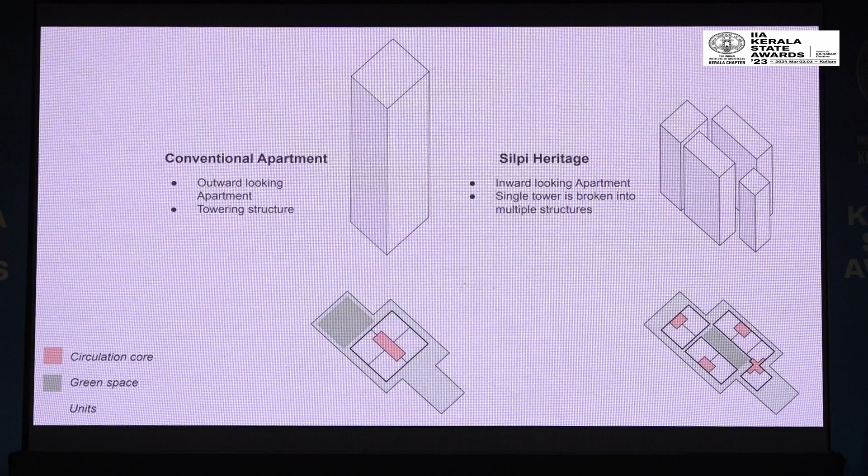Another conscious effort to create a project that remains humble to its context is to break the mass of the structure and its perceived scale. Instead of a tall, towering single structure, four narrow blocks of slightly larger floor area and consequently lower height are placed on the site. The mass is broken down to create a courtyard reminiscent of traditional family residences in the Nalukettu style.

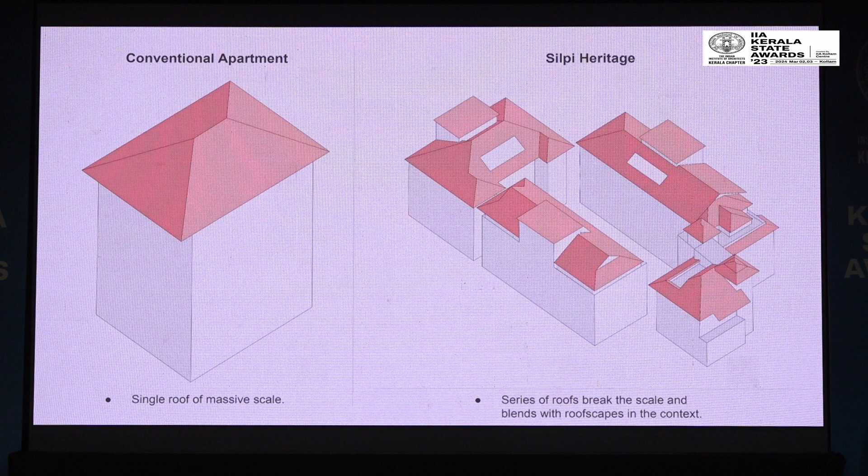With the disintegration of building mass, we were able to create an assemblage of hipped roofs of smaller scales. In this case, the scale of the roofs of our project matched the scale of the roofs of other buildings within the context. The attic spaces resulting from these sloping roofs function as shared utility spaces.

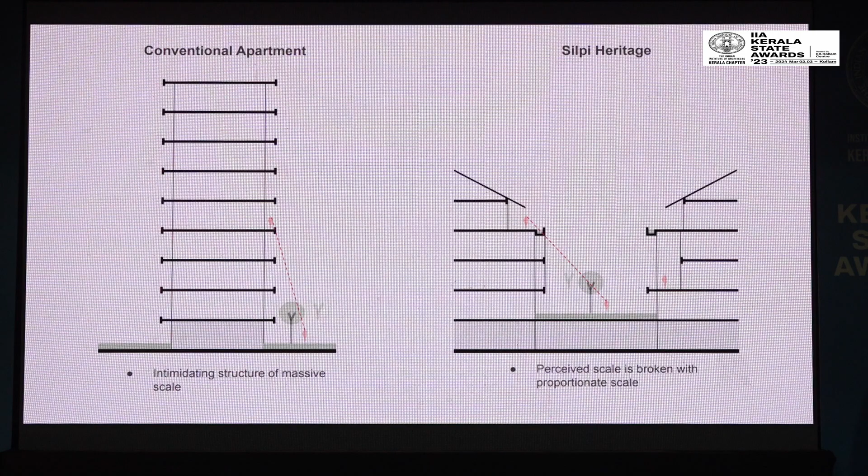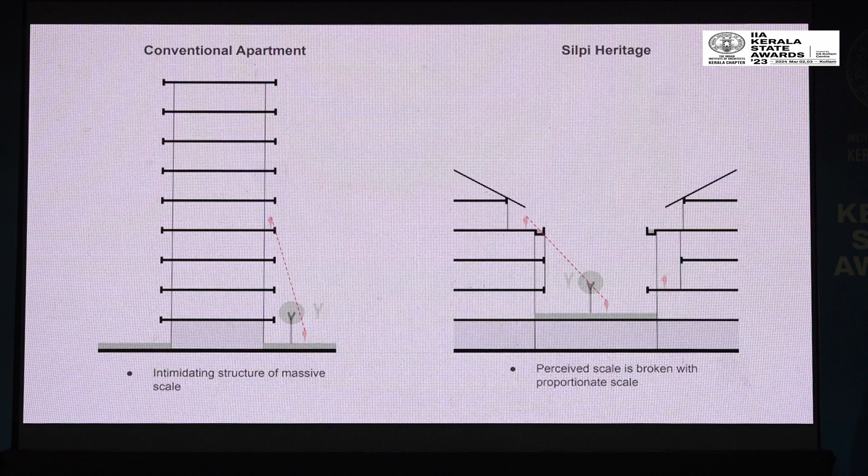These roofing structures also help break the scale perceived from the courtyard. Through this, one is not intimidated by a tall structure with a monotonous facade, but is allowed to be within a more intimate space that promotes interaction among neighbors. The variation in facades, with double-heighted balconies, recessed and protruding balconies, also helps break the perceived scale.

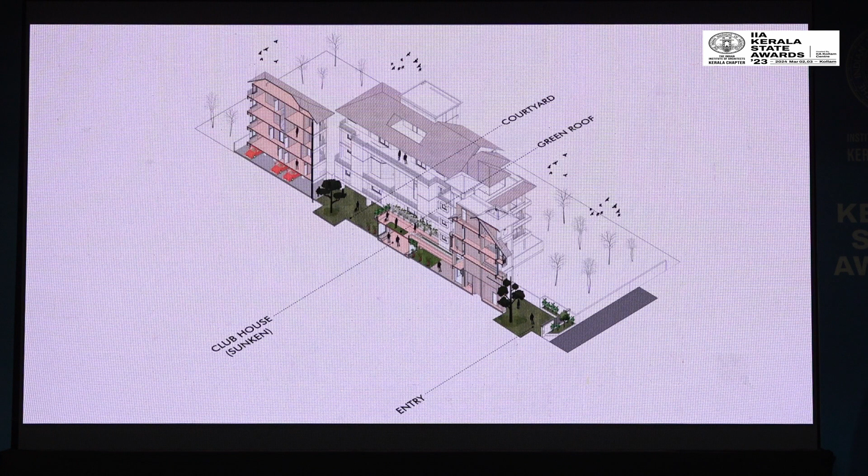The scale perceived from this courtyard is also broken down with the help of varying levels. The central courtyard is split mainly into two levels, with a clubhouse recreational zone on the ground floor. The clubhouse spills onto this green space with a slightly raised platform at its end. The space above the clubhouse becomes a green terrace on the first floor, connected to the ground with elaborate steps. There is also a staircase at the entrance that takes you directly to this podium.

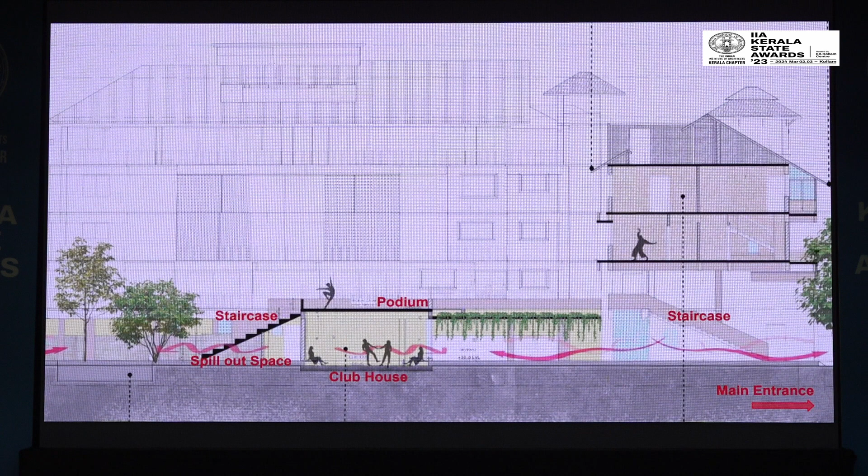With this configuration, we've also been able to retain some valuable trees within the site. Through this configuration of mass and void, of building and courtyard, we've been able to create an inward-facing apartment rather than the conventional apartment that is outward-facing and cut off from the rest of the complex.

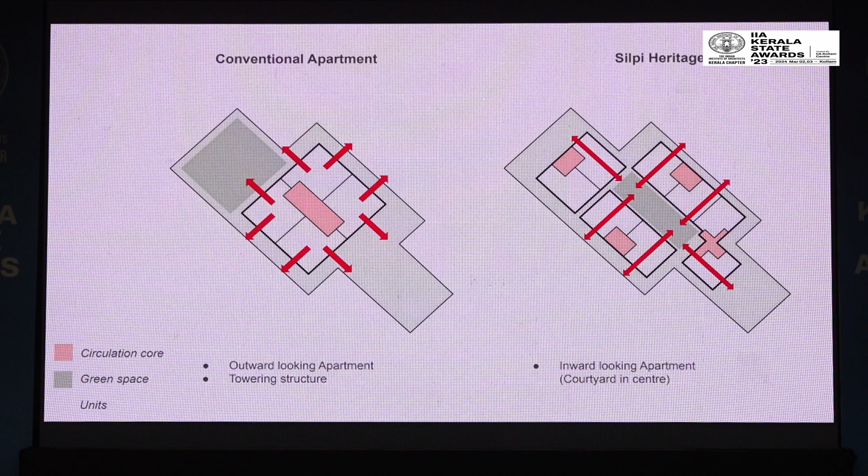With these inward-facing units, the neighborly relationships among residents are enhanced, promoting interaction. There has also been an attempt to maintain privacy by placing most of the bedrooms on the exterior side. It is also important to note that there are no typical floor plans within the project.

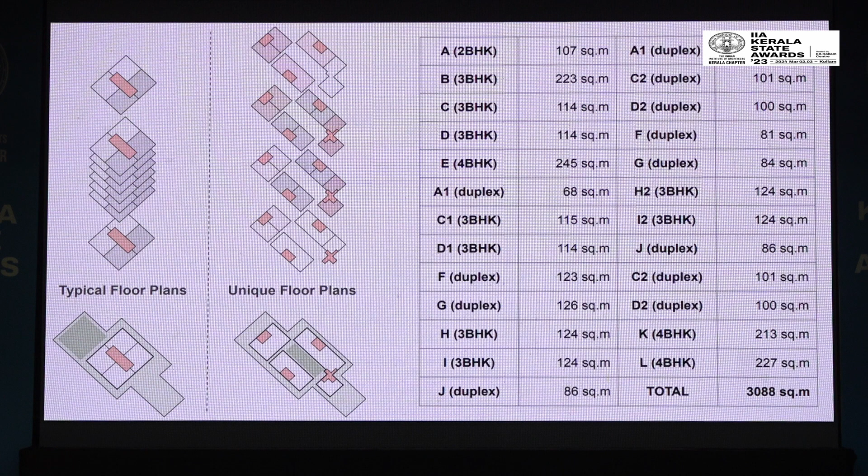The area of all offered units varies from about 1,000 square feet to 3,000 square feet. This variation caters to the unique needs of residents and buyers, and also helps avoid monotonous and repetitive facades. The project offers 2 BHK, 3 BHK, and 4 BHK apartments, and even includes duplexes and penthouses.

So next, coming to the car parking. Already adding to the points Namrata made, technically we have used around 50% coverage, but still what we have tried to do is maximize the utilization of the ground floor by bringing the terrace garden just above the clubhouse, and to utilize the space around the clubhouse.

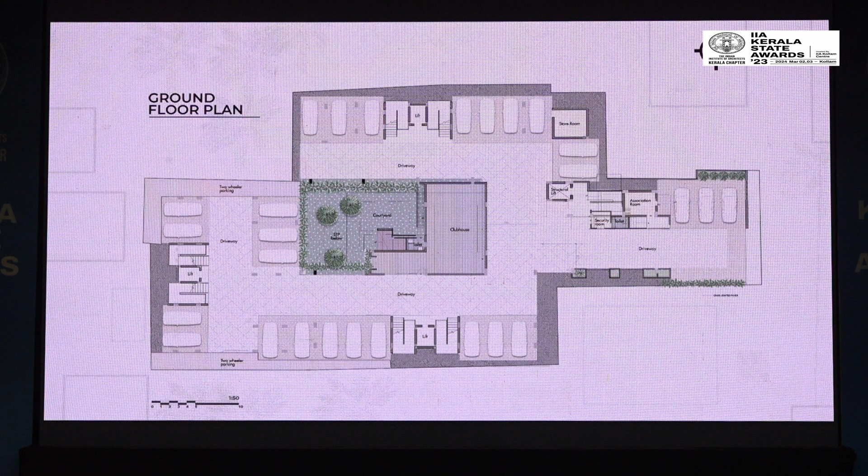For that, what we have done is bring the car parking onto the ground floor itself by giving the building on stilts rather than considering a basement. It also helped reduce the construction cost to an extent. Then by bringing this parking to the periphery, we gained extra space to spill out from the clubhouse and the central courtyard.

Then coming to the entry, what we have done is gained inspiration from the nearby building. So the entry is mimicking an Anavadil, which we could see in the nearby structures. The arrival is also resolved such that the parking spaces are kept hidden from the first point of entry. This is the entry from the Anavadil.

Then on the facade, we could see an element that we were inspired by, Kilivadil, which is also a building element found in the nearby buildings. Then we had given some viewing decks. We named it the Athachamayam deck, from where we can view the procession happening in the streets.

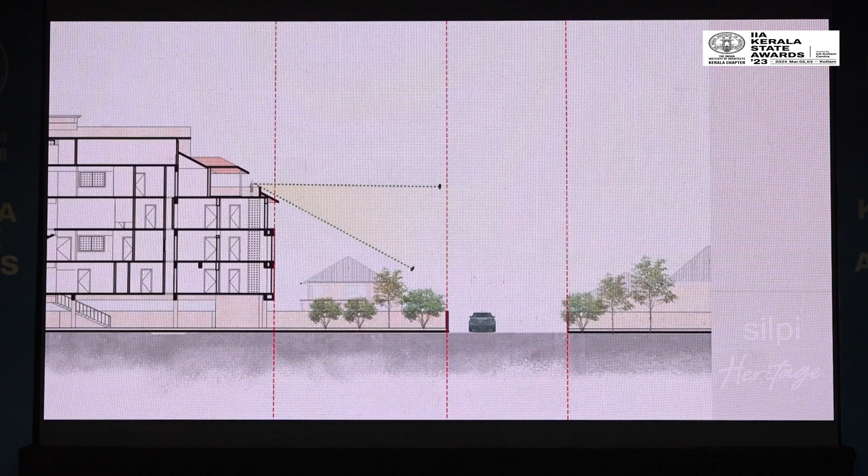Coming to the more technical details, while the available FSI was 4, the FSI consumed is only 2, with a ground coverage of 53%. While we could have built approximately 8,000 square meters, our project area is only 4,750 square meters.

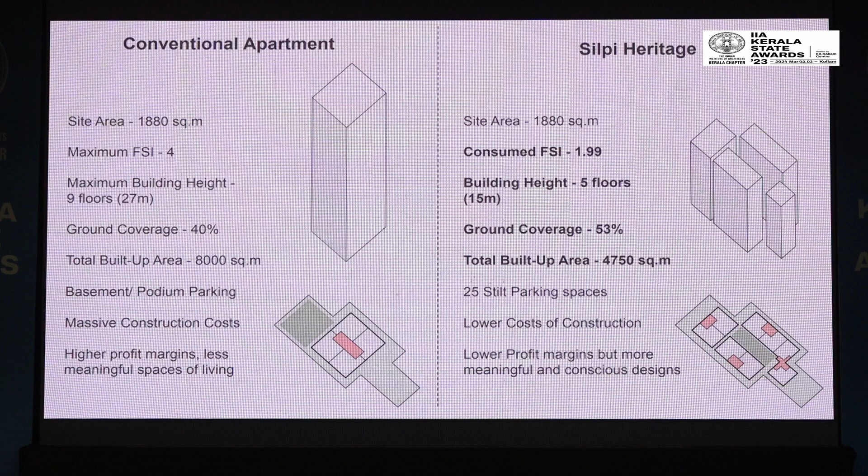After all, Charles Correa did once say, market forces do not make cities, they destroy them. And the reason we were able to create a project that deviates from conventional notions set by most developers is because here, the architect is also part builder.

Silpi Architects played both roles of a designer and a developer. Through this pairing of roles within the firm, we were able to compromise and draw a fine line that caters to the aesthetic and conceptual concerns of an architect while adhering to the concerns of construction costs and profit margins set by a developer. And the success of the project is that now people yearn for apartments like this.

In fact, we have interested buyers and are working on another project that borrows values from Silpi Heritage. I'd say this project is also an example for builders to understand that it is possible to create housing schemes that are unconventional yet profitable and successful.

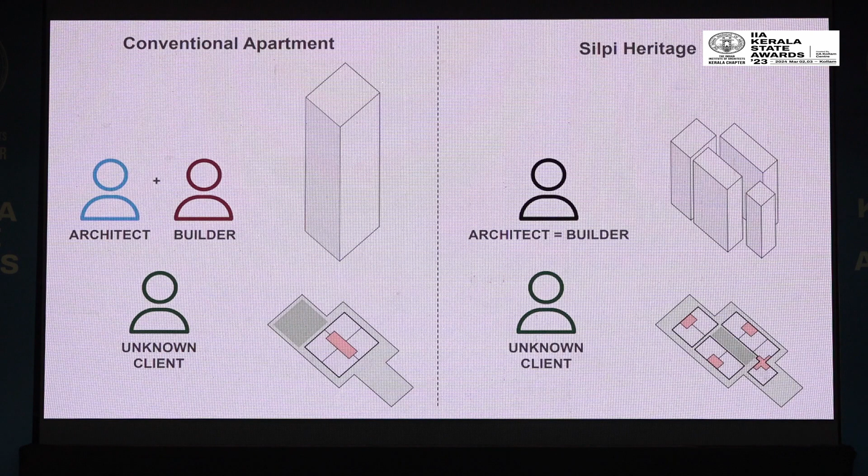I think you have articulated the USP of the project very well, which I think in these awards cycles, or frankly a lot of architects' work, is expressing the USP of what we're trying to do. I think it's a very good skill to have, because in some of our projects, we felt that what's actually important has gotten missed out in all the other details.

And for us, what drew the jury to this is that we all, I think, recognize what market forces are doing to the cities and what they're doing to the practices. And I think one way to engage with them is to actually, in a way, join them and then try to turn them from inside.

It's slightly tricky in the sense that, like with most developers, they won't go for an FSI of 2 if there's 4 available—they would go for the whole 4. So actually the real challenge in something like this, which is possibly not possible, is whether we can get closer to 4 but still manage the quality, because otherwise the replication of this model becomes slightly tricky, since for developers there's never enough profit.

What's the maximum profit? Everything else is a loss after maximum profit.

Having said that, again, all these awards cycles have value in what they put across. And I think it's high time, rather than being victims of the thing, we try and see how we can engage best. It's really nice because you don't see this very often now, to see housing in a tight urban scenario with constraints and commerce built into it.